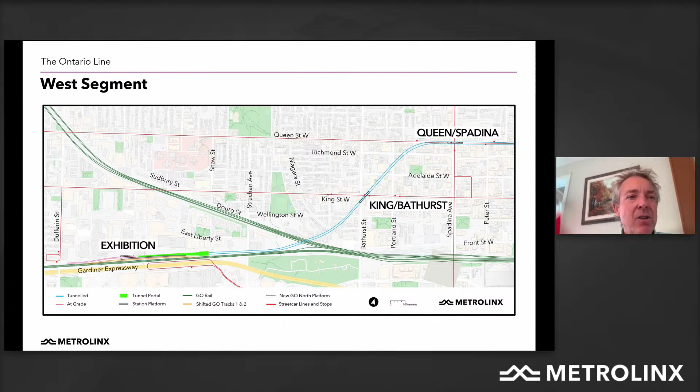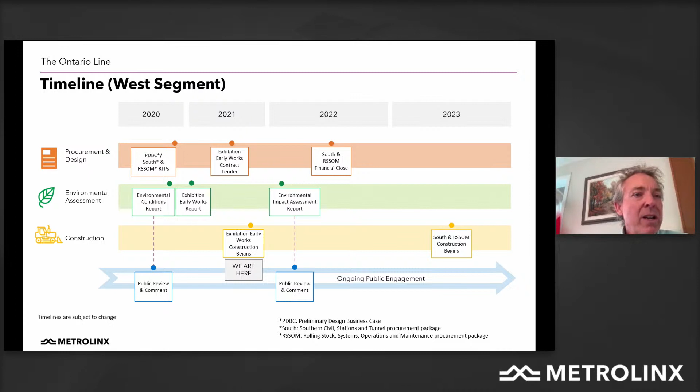So our timelines are coming up quickly. Later this year, we're going to be starting some early works at Exhibition Station. Early in 2022, we're going to issue the environmental assessment report and receive public feedback on that. Mid-2022, we'll award the two big contracts currently out for tender: the South Civil Stations and Tunnels contract, and the RSSOM contract, which stands for Rolling Stock Systems Operations and Maintenance. By 2023, we'll be constructing in the field.

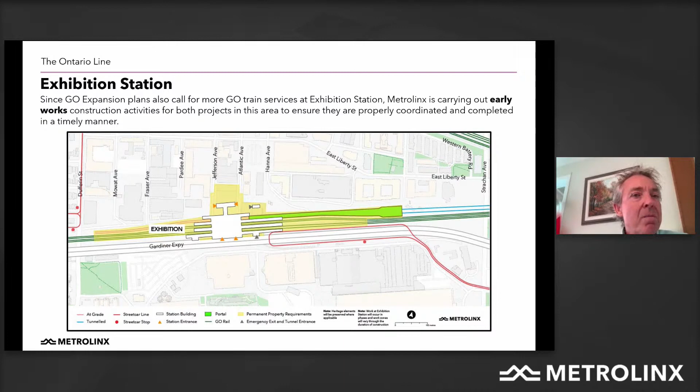Exhibition Station is sited where the current exhibition station is along the GO corridor. It's situated very well to have an excellent transfer with the existing GO lines. It's also immediately adjacent to the TTC surface network, and it meets up with Exhibition as well as Ontario Place. To the north, within easy walking distance of 10 minutes, is the majority of Liberty Village.

Richard, can you cover the early works? Hi Malcolm, thanks very much, pleasure to look at the early work. The draft early works report was issued at the end of last year, 2020, and received final approval and issuance in February 2021. The tender for the early works was issued back in June of this year, and we've received the submissions, which are currently undergoing evaluation. We expect to be able to start work in this area in October of this year, all things proceeding as planned.

Looking at the early works, the overall map provides context. Most of the early works are located on the north side of the corridor. In general terms, the early works are preparing the way for the creation of the combined GO Ontario Line station, allowing room for a center platform in the GO tracks so that all the tracks will have a platform. As part of this work, the two northern GO tracks are moved to the north. We have a new platform and the realignment of the train tracks, which is item D, and the new platform, item C, a temporary platform to allow construction of the final overhead concourse station. Item E is an overhead pedestrian bridge designed to relieve crowding that currently occurs in the tunnel that passes under the tracks, and would be in place for about 10 years.

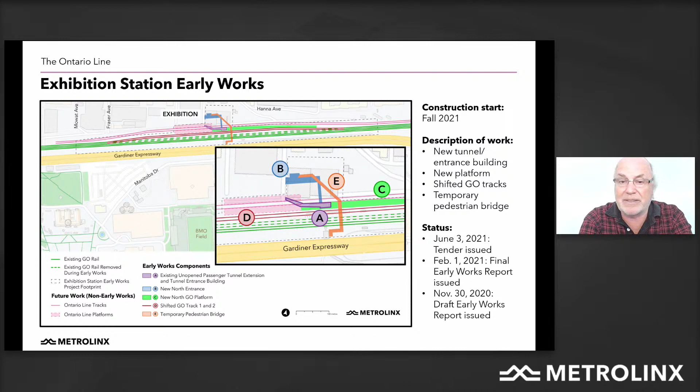It will also allow pedestrians to pass over the construction traffic as they move east to west, toward the start of the launch shaft for the tunnel, which will be somewhat to the east near Strachan Avenue. Item B is the new north entrance being constructed at One Atlantic, which is scheduled for demolition and will be one of the first pieces of work. Item A, also one of the first early works, is to bring the existing unopened passage, elevator, and head house back into operation, to allow for that crossing of the railway corridor.

And I think that's over to Celia. Or is it back? I'll take that, Richard. Okay, sorry.

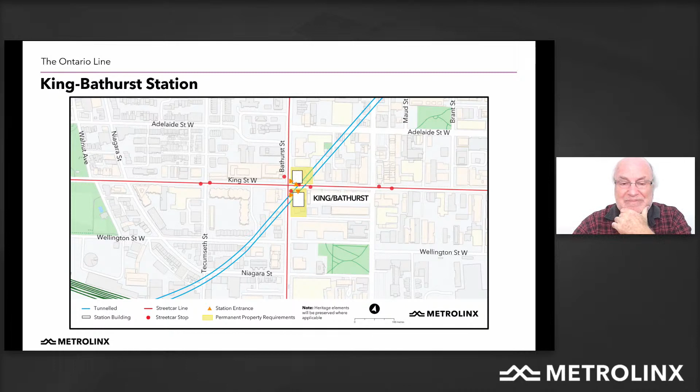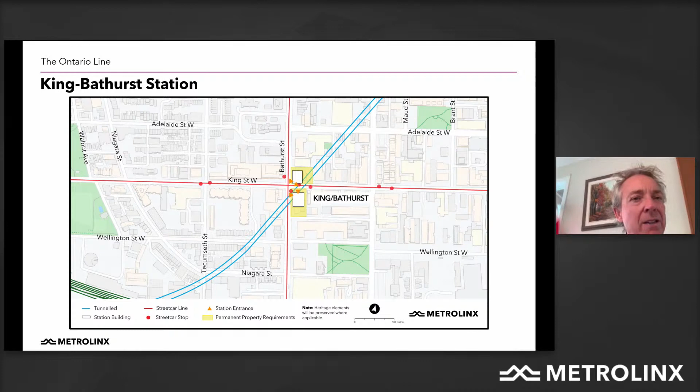So this is King and Bathurst Station, and the two boxes on the north and south side of King Street on the east side of Bathurst are where the entrances are going to be. During construction, we're going to be mining vertically down in those sites and then mining across under the street, called a sequential excavation method, to build the station. We're doing this to make sure that the streetcar and surface transit networks and traffic remain open during construction.

Similarly, at Queen and Spadina, we have two entrances, one on the southwest side of Spadina and one on the northeast side of Queen and Spadina. Once again, we're going to be using sequential excavation methods, SEM, to build this station and minimize the impact to traffic in the community as a result of building this infrastructure.

So now we're going to pass it over to Celia for a discussion about the design principles.

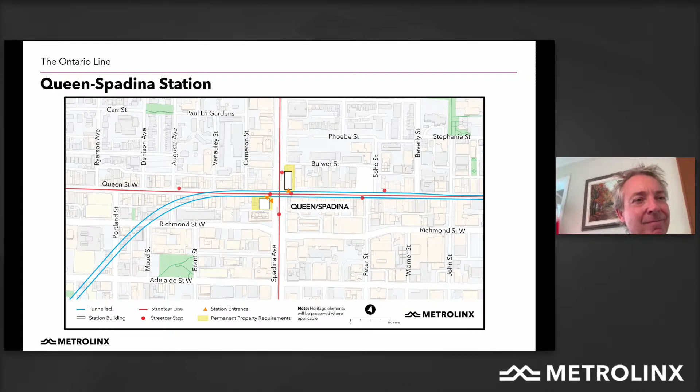Celia? Yes. Next slide. Next slide.

Yes, so we've established 5 primary design principles for the project. The first one is system reliability. This is important that it's first; we're primarily designing a transportation system, and it's important to everyone that it functions well and reliably and the trains run on time. The second one is passenger-focused design. So really, after our first principle, everything about the experience is from the passenger's point of view. The design of the project is really to make it a friendly and high quality experience for the passenger.

And then thirdly, it's the public realm benefits and placemaking. The Ontario line is running through a lot of varied different neighborhoods in Toronto, so all of the station locations need to be adapted to their public realm and act as a catalyst. Then context and integration—we need to integrate the station and the system into all of the different neighborhoods that we're traveling through. And ultimately, we want to have intuitive wayfinding.

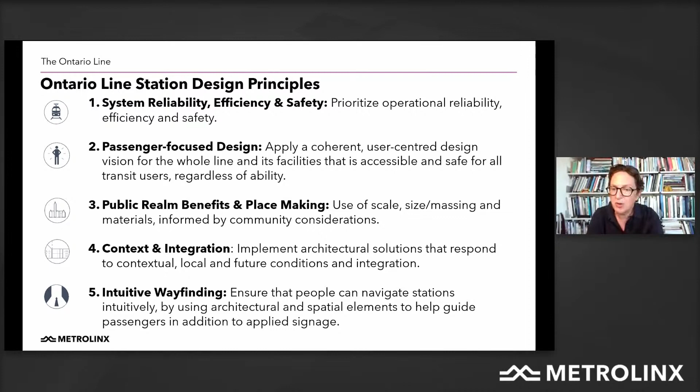We want to design the system so it's easy to use, so you're able to use it without a map and really without signage. All of the stations are designed in the same way, which means anybody can use them, even people who are tourists or unfamiliar with the system.

So just some of the key considerations: we have 3 types of stations. We have inline stations, pavilion stations, and interchange stations. The inline stations are the ones that occur along the line. We have special interchange stations that interconnect with other services, like at Exhibition. And then we have pavilion stations—there are a couple of locations along the line where we have a standalone entrance pavilion integrated into parkland.

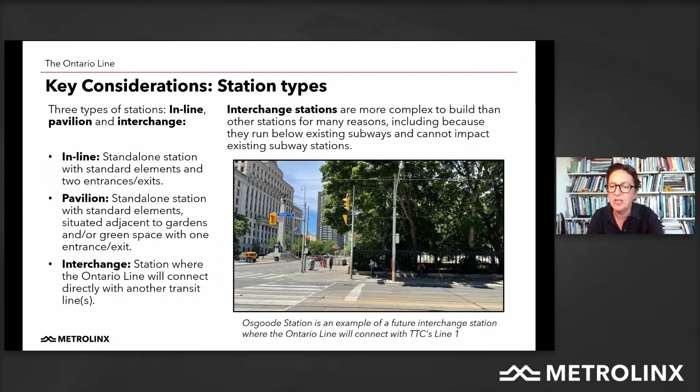So the things that influence the size and shape of the station: we start with the passenger amenities. We require elevators and a barrier-free path of travel. It's also about the entry points and where they're located in the city, their proximity to other services, including drop-off points. We have service space integrated into the stations, vertical circulation elements—all of our stairs, escalators, and elevators—and then public circulation space, which is primarily the passenger path of travel that all the stations are designed around.

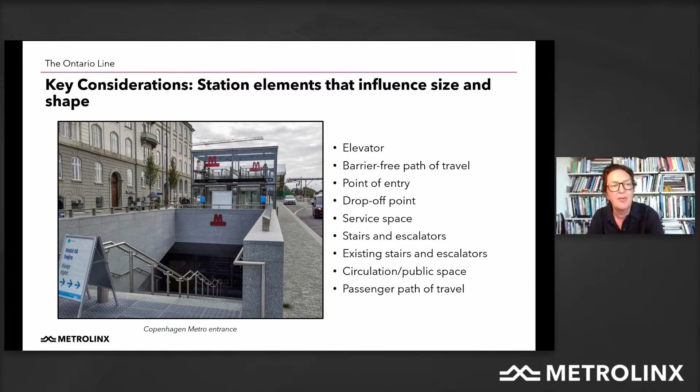So system reliability, the things that we consider when we're designing is that we have durable, long-lasting materials, timeless materials. We are designing these stations for 100 years or longer.

We design to facilitate intermodal transit and connectivity. One of the primary things we do in the planning is make sure that people's connections are as short as possible, that we're not sending people down long routes in order to accommodate. So we look very carefully at how to make the routes as short as possible.

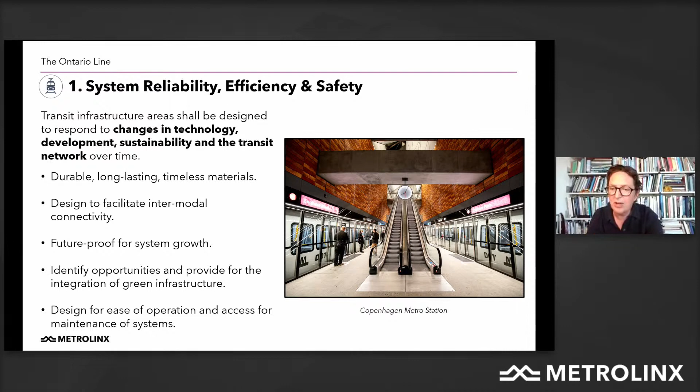We look at opportunities to integrate green infrastructure in the design of the system overall, and we design for ease of operation and access for maintenance. The importance of that is a few things: it leads to reliability of the system, dependable, on time, efficiency, and also safety. One of the reasons we design for maintainability is so important is that with minimal maintenance and very high quality materials, it means the stations look good, and they can reliably look good for a long time.

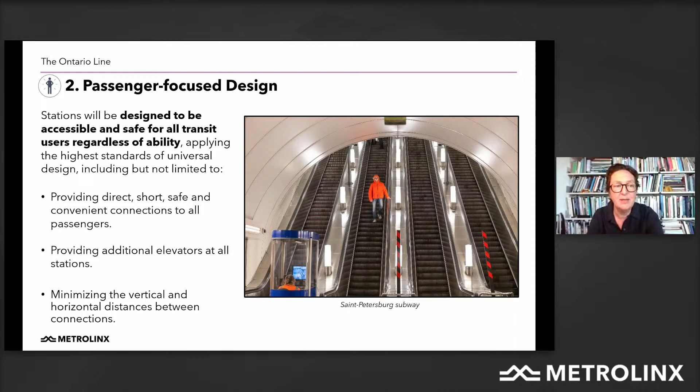So part of passenger-focused design is that we have abundant circulation, properly sized, that can handle the crowding. We always have two elevators, redundant elevator paths into the stations. We have platform edge doors, and this protects the passenger environment, and it also provides a more pleasant and cleaner environment inside the station, which gives you an environment on the platform that's better for people, and also helps with the efficiency of the system, so that trains can run, and you pass through platform edge doors that just open when the train arrives.

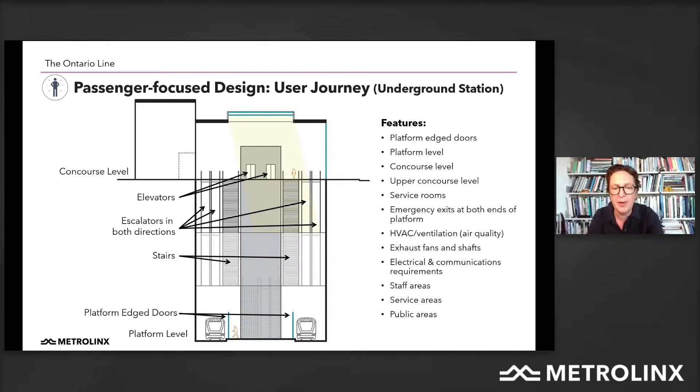We have logical vertical circulation paths, so that makes the journey easy, and you can see your destination as much as possible. Throughout, we're providing passenger amenities and real-time information, and we provide designated waiting spaces on the platform where the trains arrive.

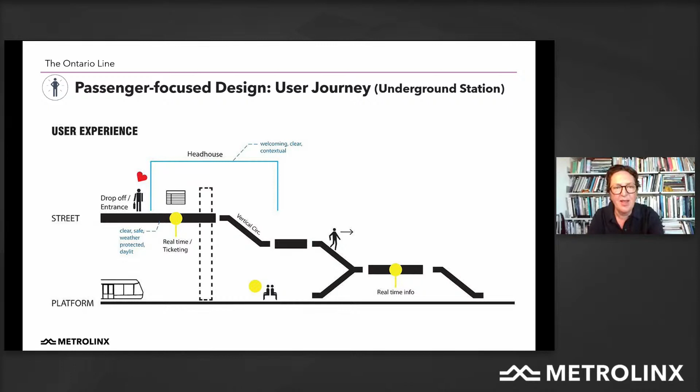So passenger-focused design for safety and accessibility. We're designing with multiple elevator paths, so that an elevator that's out of service doesn't affect the accessibility of the station. We have dual accessible paths from street to platform, and through information and design, we identify the accessible routes, which are the same routes integrated with the main entrance.

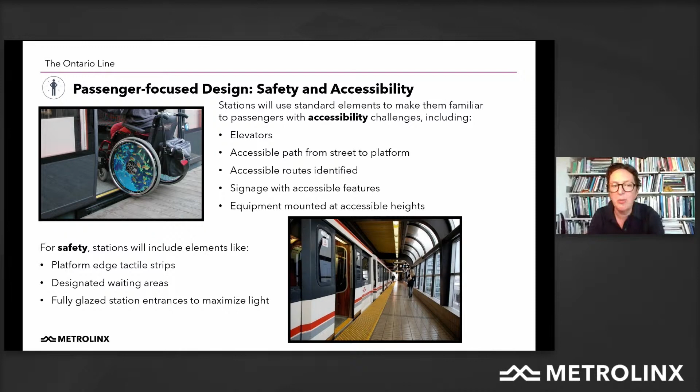We consider space proofing to make sure the accessible routes have enough space to function. We have special signage and equipment mounted at varying heights to ensure the widest accessibility. We have platform edge tactile strips to indicate where the doors are and where they'll open to give access to the trains. We have designated waiting areas and fully glazed station entrances, and we're designing lighting strategies to help with natural wayfinding and accessibility in the stations.

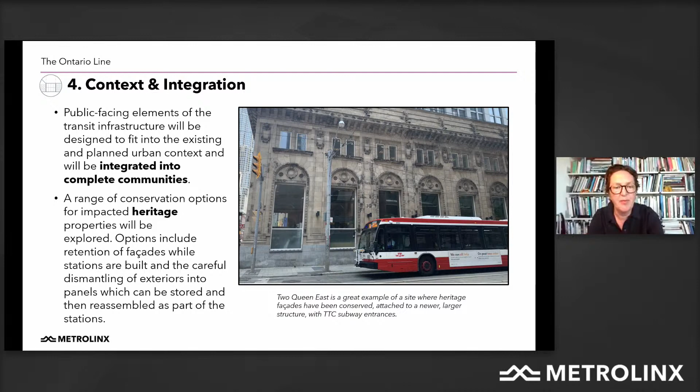Intuitive wayfinding is a fundamental theme for making a station easy to use for the widest range of people. We have signage and so on, but really the stations are designed to work without needing to read signs. We have transparent street-facing facades, and typically have fare collection and fare zones up at street level, so it's very easy to see that our entrances are transit stations. As part of intuitive wayfinding, we're also integrating street furniture, canopies, signage, and information, making sure you can see the station from down the street.

We balance intuitive wayfinding between things which are consistent system-wide. We want people to be able to use the different stations, but use them in the same way. So if you're stopping at an unfamiliar station, you don't need to learn the layout - they'll function, and the wayfinding will have the same cues. You know, a shirt has different cuffs and collars, but the buttons are the same.

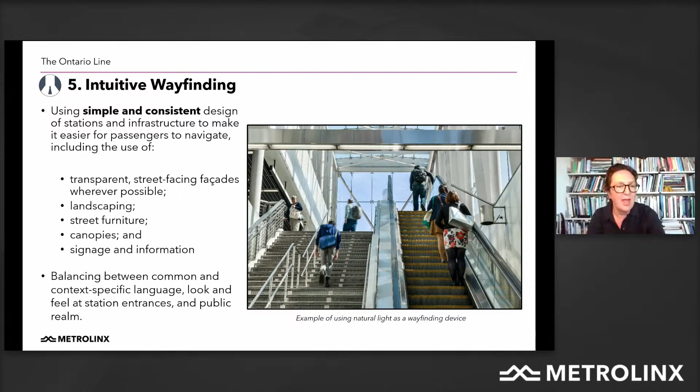And then the station design - these buildings are built for a long time, so we have very high quality standards. We need that; they're very heavily used buildings. We're setting standards with very high quality finishes and integration, for example, of terracotta to integrate into some heritage neighborhoods. We have very high quality glazing standards and materials. Fundamentally, this is so that our buildings look very good, and they look good for a long time.

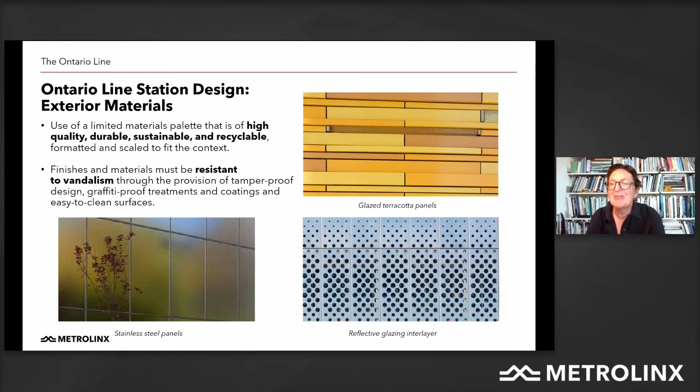Interior materials also - we use very hard-wearing materials, but part of the palette of materials for the Ontario line is that we also want some warmth. So we're looking at a palette of materials that is very hard-wearing, but that gives a warm feeling.

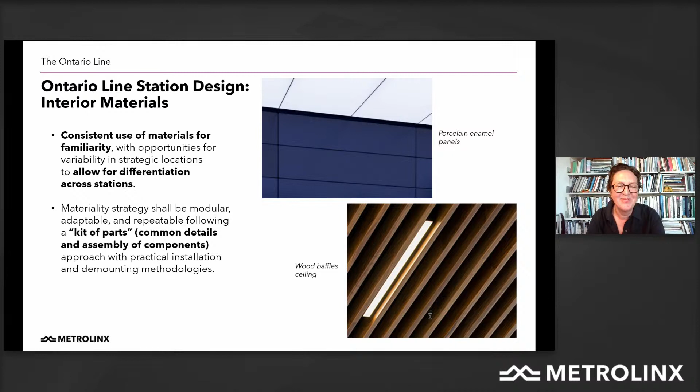Next slide. I think that's to you, Malcolm. Yeah, that is, Celia. Great job.

Thank you so much. So what's next for us? We want to come out with regular updates and more virtual events, and you heard Joseph refer to some of those. This is an opportunity, and there's a continued opportunity for feedback and to ask questions. As soon as we possibly can, and we're allowed to, we'll have safe in-person meetings and public events in place to be able to see you face to face. The exhibition early works construction begins in the fall of 2021, and then the impact assessment report is due January 2022, with the draft report open for public feedback, and then it will be incorporated with the final report issued in April 2022.